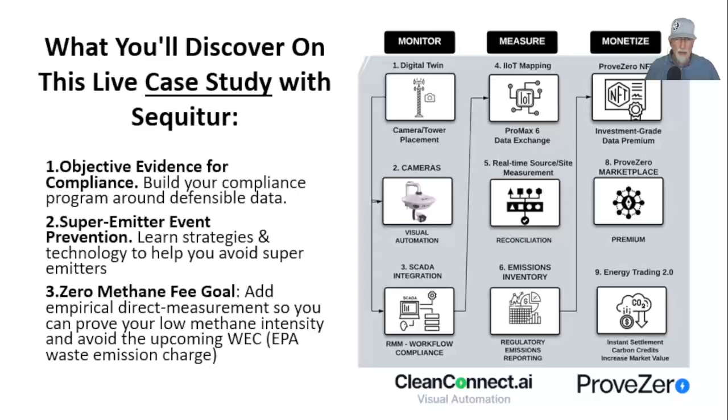So you're wondering, am I in the right place? Well, you are, if you want to learn from an actual operator how he built objective evidence for compliance for Quad O-B and C, and super emitter prevention, and zero methane fee goal. That's the goal, right?

A little bit about me. I'm the co-founder of CleanConnect.ai, host of Digital Roughnecks, a video podcast, founder of Windows NT Magazine, and author of the EPA cheat sheet. CleanConnect is a hardware-enabled SaaS company, so we make our own cameras. First government-approved continuous OGI source-level leak detection system, and first government-approved source-level GHG intensity verification protocol. The 2022 and 2023 Darcy Partner Top Innovator Award winners, and winners of the Oil and Gas Tech Challenge.

I'm here with Russ Perry, the Corporate Health, Safety, Environment, and Regulatory Director. He manages a team of 9 HSE professionals aimed at surpassing mere compliance to foster a proactive safety culture, with 30 years of HSE experience in metals, mining, and energy sectors, and expert in regulatory compliance, environmental auditing, and remediation management. He speaks at a lot of conferences. In fact, we were both speaking at 4C, and we said, why don't we do a webinar together, which is the reason for this webinar today.

Full disclosure, Sequitur is a client of CleanConnect.ai. In his past, he led BP's team post Deepwater Horizon incident to achieve 100% compliance with government agreements and consent orders. He's a licensed professional geologist in Texas, holds a BSc in geology from the University of Illinois at Urbana.

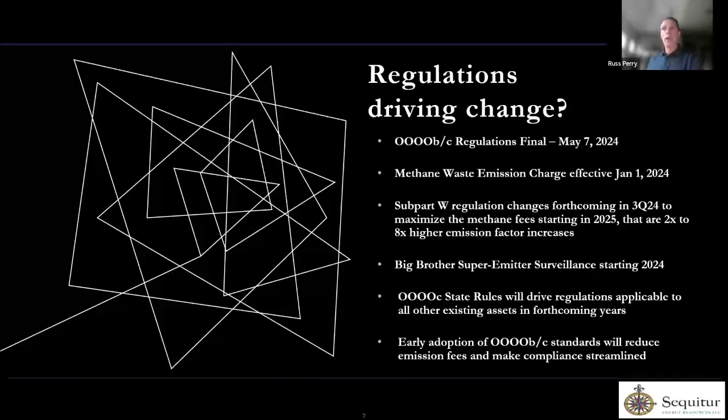We're all familiar with the super emitter program. So what we want to do is make sure we keep our facilities in compliance and avoid situations where there could be a super emitter event. Quad O-C is forthcoming, the states are going to propose that. But the message you're going to hear over and over is that early adoption of the Quad O-B-C standards on all your assets will effectively reduce your emission fees and make compliance more streamlined. In other words, if you adopt these standards on your older facilities, and facilities that aren't applicable to Quad O-B, earlier, you will get to a zero waste emission fee sooner.

So I'm going to focus on those areas. Some of you might have multiple assets, also including potentially gas processing plants, or if you have midstream. But my message is really going to focus on onshore production and gathering and boosting.

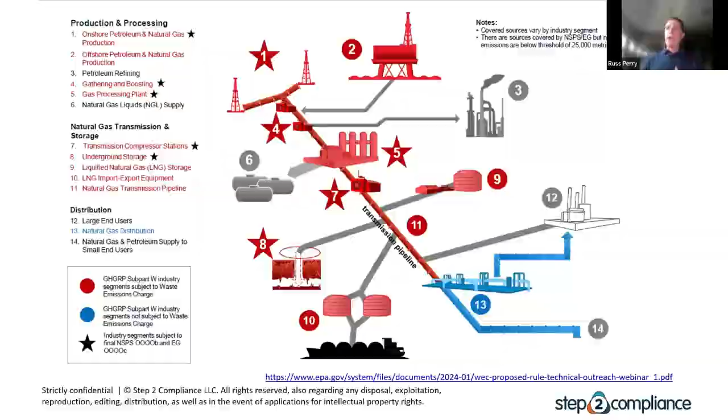Just for clarity, SEM Operating operates solely in the Southern Midland Basin in 4 counties. We are an exploration and production company, and we own a lot of our midstream infrastructure, so our own gathering and our pipeline. We don't officially have compressor stations, if you will. That goes to an off-taker. They purchase our gas, but they are officially the midstream. We just own a majority of our infrastructure.

Now, looking at the waste emission charge, where do you start? How do you streamline your compliance and also get to a point where your waste emission charge is zero or near zero? There's a lot of places.

One of the best places to start is to understand your subpart W greenhouse gas report and your calculations. You're going to have to own it. You're going to have to understand all those different source categories, what they mean, and what information goes into it. Take your 2022 data and your 2023 data and use the proposed waste emission charge calculation and calculate what your fees are.

That's one of your first things you're going to do. You need to inform your management what those potential fees are. Now that you have a baseline of what those fees are going to be, you need to take that money, invest it back into your infrastructure, and make those improvements to reduce your fees. Don't make a donation to the WEC. Don't send your money to the government.

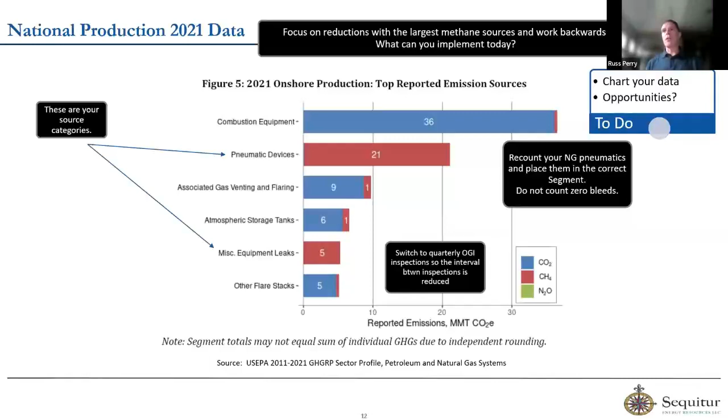Now, our journey started with pneumatics. We did a quantitative analysis. We looked at each segment, so gathering and boosting and production, and then we looked at each of the source categories. We had to dissect that information. We calculated what our potential waste emission charge was. We informed management what that is. They came back, and our goal is zero year after year.

And what do we have to do to get there? We charted all this out, and we created some very unique informed decisions. We risk ranked our facilities. We risk ranked our categories, specifically on the methane portion. And we wanted to really understand where we needed to direct monies. How do we improve facilities? How do we improve automation? How do we improve our data in order to get these numbers down?

So we identified our biggest bang for the buck was focusing solely on pneumatics. Now, some companies might say, hey, we've already addressed our pneumatics. Well, make your informed decision, create something that's fit for purpose. But you're going to do the same process.

You're going to look at your categories and you're going to review your data. We identified that pneumatics in our subpart W, especially on the gathering and boosting side, was 80% of our methane portion.

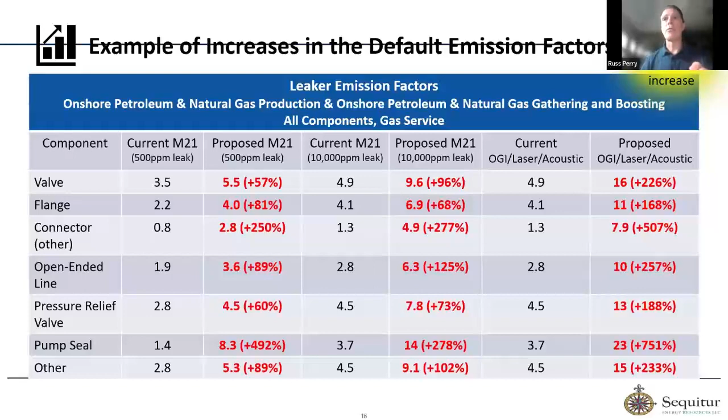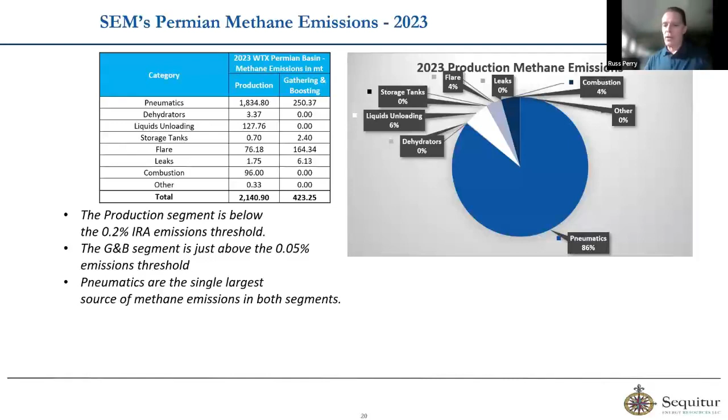So improvements can be made in other areas, such as liquids unloading and flaring. Those are kind of our secondary areas where we've put administrative controls in to reduce flaring. In other words, making a decision to shut in wells in lieu of flaring. Those are more or less administrative controls that you can put in place very easily just based on facility and company policies.

So when we look at pneumatics, I'm going to focus right there. One, we knew that we had to go after pneumatics first. Taking the subpart W data and working backwards, we found that each pneumatic controller that we converted saved 1.5 metric tons of methane per year. Now that's just working backwards.

What that gives you an idea of, for every pneumatic you convert, you can actually create a goal. If you had to reduce, let's say, your methane by 1,500 metric tons, you knew that you had to look at approximately 1,000 units. So that's just a good number to have.

We also identified that for pneumatic pumps and for the pneumatic controllers, there is a difference between runtime hour calculations, and some people call it the pneumatic loophole in subpart W, but EPA did come out and say that it's not the actuation time for a pneumatic, it's actually the amount of time it's pressurized. So one thing you can consider for pumps that are manually operated, in other words, you have to physically turn a valve, you can use the actual runtime in lieu of 8760 hours per year if you manually operate your pneumatic pump.

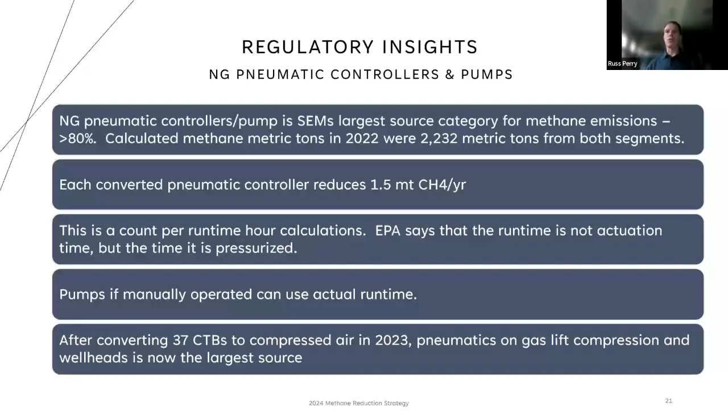So that's just kind of a hack that you can use when you're doing your subpart W calculations. One of the things we did is we identified how many batteries we needed to convert in 2023 in order for when 2024 hit, we would have a zero waste emission charge. So in 2023, we converted 37 central tank batteries to compressed air, and we are just right at that sweet spot where the waste emission charge will be zero or near zero just from doing those conversions.

One thing we've also seen in Quad OB is that there is a 1-year compliance date to get your pneumatic controllers. EPA did rename our new natural gas pneumatic devices over to the name pneumatic controllers. There's a 1-year compliance date for your Quad OB applicable facilities and applicable devices. Now, one thing I will say is don't wait. If you are an early adopter and you convert these early, you will see, year over year, your emissions and your fees reduced just by being an early adopter of converting these pneumatic controllers over either to compressed air, or routing that source back to a process. Those are the two most cost-effective ways, in lieu of buying a new type of controller or a zero bleed controller. So just being an early adopter, just think about that.

Flaring is our second largest source of waste emissions in these calculations. Now, in 2023, in those numbers, we used a 98% efficiency. But if you look at the proposed rules, which we'll see here in a few weeks, they're going to go down to 92%. So you're going to have a significant reduction in your flare efficiency, and your numbers are going to go up. That's just from an emission calculation—you didn't change your asset. It's just EPA said, hey, you're going to use a different calculation method. So going forward, your flare efficiency is going to be paramount, and a system to monitor and verify that your flare is operating efficiently is going to be important to verify compliance underneath the Quad OB requirements.

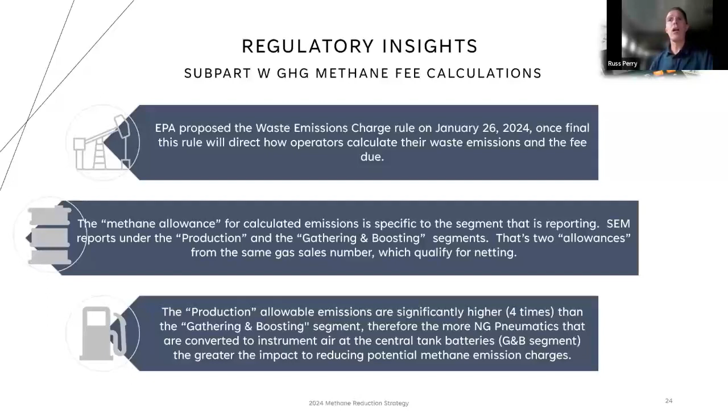So here's a couple scenarios. Let's say you are an upstream producer and you've been reporting in the production-only segment since 2011, when the regulations came out. Why are you reporting there? Well, our consultant told us. But if you look through the definition of a centralized tank battery, you'll find that centralized tank batteries actually fall underneath the gathering and boosting side.

What would this mean for a smaller producer? If you bifurcate, or identify where you need to reallocate your production and gathering and boosting data based on the EPA definitions, you might find you're exempt from greenhouse gas reporting altogether, or that your production number is smaller and the gathering and boosting side is small. This is something you as an operator need to look at in your data and the definitions to see where you fall.

Here's another example. You need to look at the true definitions underneath production and gathering and boosting. We did that between 2021 and 2022 and found we were reporting information in the wrong segments. So we did a very careful recount of our pneumatics, looked at which data was placed into which segment, and made the appropriate change through advice of legal counsel, who was aware of the regulations and definitions. We made this strategic, required change into the proper segments.

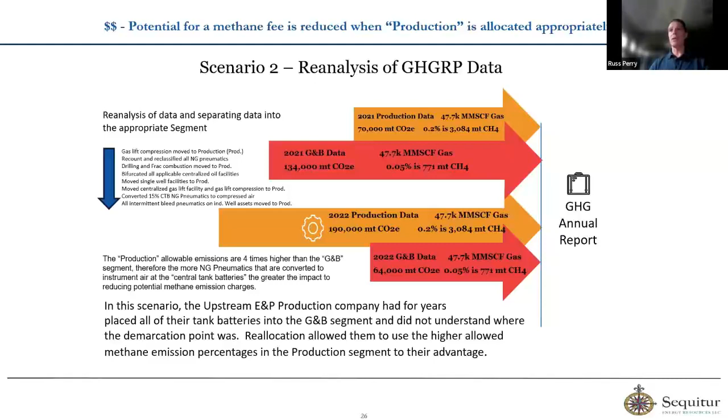Once again, why this is important and why it's going to move the needle in future years is because the allowable emissions are 4 times higher on the production side compared to the gathering and boosting side. So having your data in the right segment is imperative going forward now that this has been monetized.

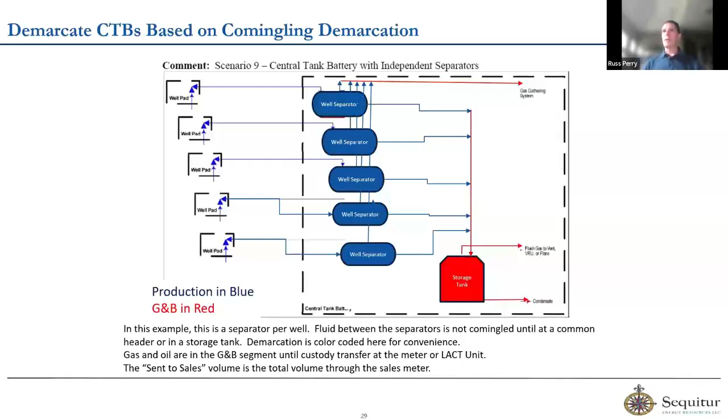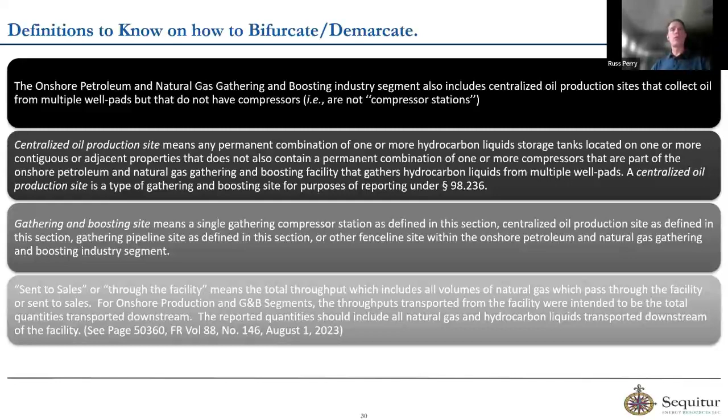I mentioned bifurcating and demarcating between your two segments—it's important to understand the definitions. These come either out of Quad OB or Subpart W. Keep in mind, with these regs being published in the next couple of weeks, we're going to have additional clarity on what these true definitions are, since some were proposed in 2023. Keep in mind, production definitions came out in 2011, but gathering and boosting under Subpart W didn't come out until 2015. So you need to understand where you're pulling your definitions from and make sure your demarcation is done appropriately.

The waste emission fees—this is probably one of the most paramount things you have to understand. Your waste emission fee is going to be based upon your total throughput at your sales point. This throughput includes all the natural gas and hydrocarbon liquids transported downstream from the facility, out of your gas sales meter. So when you ask your accounting, production, royalty, or operations department what your gas sales meter number is, you're going to get probably 4 different numbers—I received 5, depending on who I asked and how I asked. This is key because your waste emission charge is based upon a calculation from that gas sales meter at the back end of your facility.

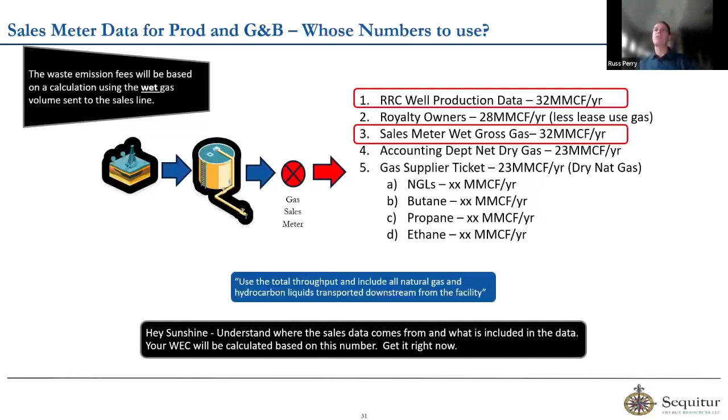For my company, it is a wet gas, a gross gas number. It happens to align with our Texas Railroad Commission well production data, but it is a wet number. If I ask accounting, they give me a dry gas number, because they get information from our midstream buyers that breaks out NGLs, butane, propane, ethane. So you want to get this right—you need to understand this gas sales meter number. All right, different insights, different areas.

Since your waste emission fee is based upon your gas sent to sales, you need to maximize that. There's a couple areas you want to focus on. More gas to sales means you have a lower calculated waste emission fee.

These are my top things: make sure your VRUs are sized properly, have high reliability and good runtime. For most of us operating in the Permian, it's the vapor recovery units on our vapor recovery towers and tanks that put additional gas into the sales line.

And with high line pressure, you have to have the VRUs to get that gas into the line. You want to make sure your alarms are turned on and you get those notices promptly. We have one facility where we have the Clean Connect AI system.

And what we noticed was all of a sudden we get an alarm from the Clean Connect system within 10 minutes saying, hey, we have thief hatches leaking. Why are the thief hatches leaking? Well, what we identified was our VRU went into default. So after 10 minutes of these VRUs being down, we started seeing a little poof on our thief hatches at this facility, and we get this alarm from Clean Connect.

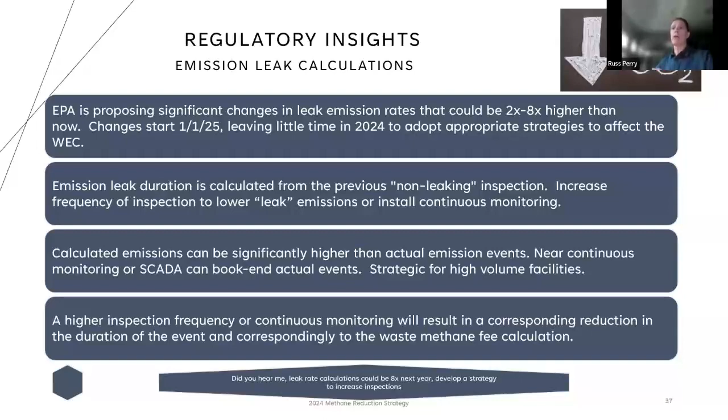So once again, these leak rate calculations for the 2025 compliance year can be as high as 8 times. So develop your strategy now, increase your inspections, look at the alternatives, put your strategy in place.

Record keeping. When we looked at Subpart W year over year, every year we have identified little nuggets that we could do to improve our record keeping, to improve our objective evidence, to verify compliance.

What is essentially happening is Subpart W has been hijacked. It is now truly a carbon accounting form. Every CFO in every corporation is now going to be asking, I need your waste emission charge, I need to know those projections. It potentially will be something that is going to be audited. It will create a requirement for attestation. The paradigm is shifting.

Understand the importance of all the data going into the Subpart W, why your record keeping is going to be important, how you're going to collect it, refine your record keeping. And what you're going to identify is you need more frequent data collection. So we decided to go on monthly and recalculate those waste emission charges every quarter, creating a projection every quarter of what that potential fee is, and using that timing as an opportunity to strategically identify different areas where we can reduce those fees.

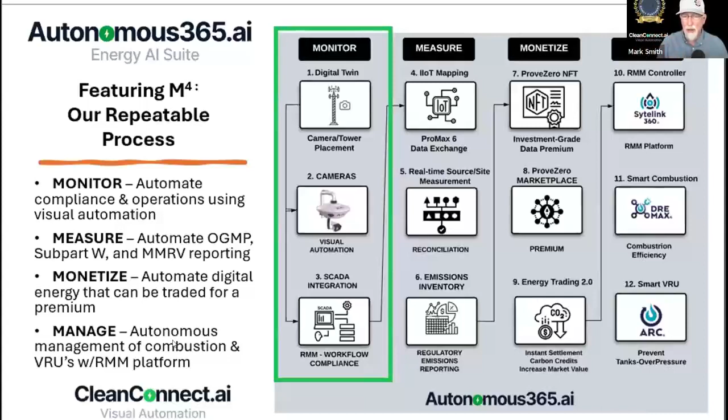I'm going to focus primarily today on the monitor side because that's a lot, but we could also get into the measure, monetize, and manage.

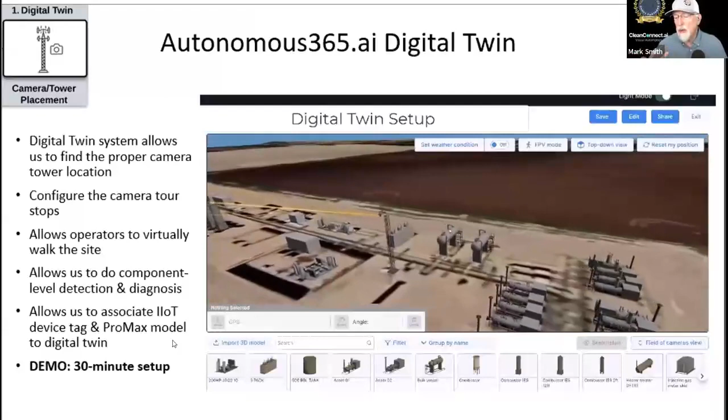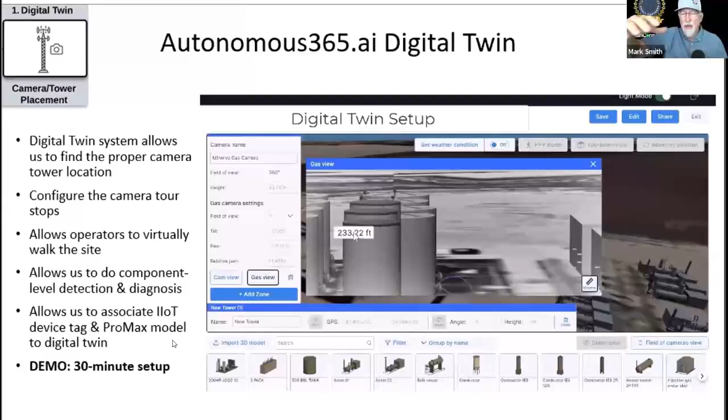So on the monitor side, what we do is we first set up a digital twin. We originally created this digital twin because what was happening, we'd have an installer go out on a site and we're like, where do we place the tower? Where do we place this camera so that it has the best viewpoint, the right height, the right distance to all the objects, so we can see everything on a site for continuous OGI monitoring.

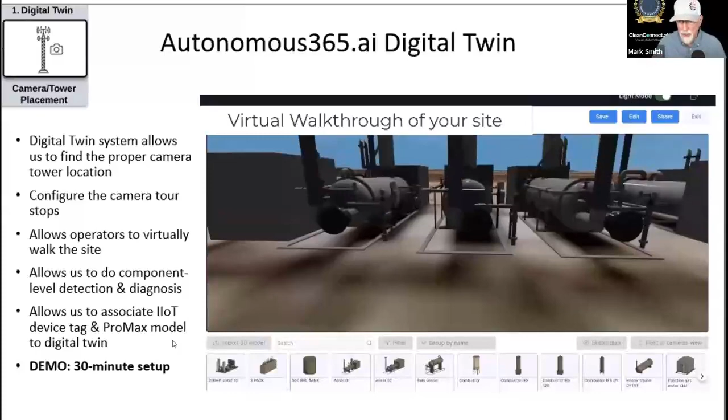You can see here that this digital twin allows you to literally virtually walk through a site, and this would have been super handy. I was with another client who's trying to get a permit, and the regulators were really struggling to see what this site is going to look like when it's actually built.

And I think in the future, we show them a digital twin, they'll say, oh, now I know exactly what this is going to look like. But what it allows us to do is set up the configuration, the tower location of the cameras ahead of time.

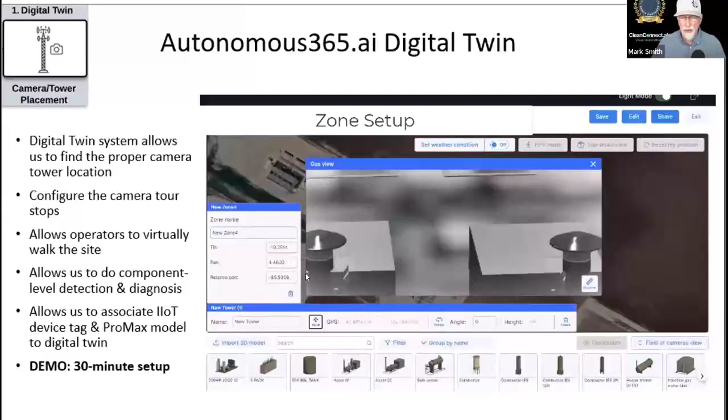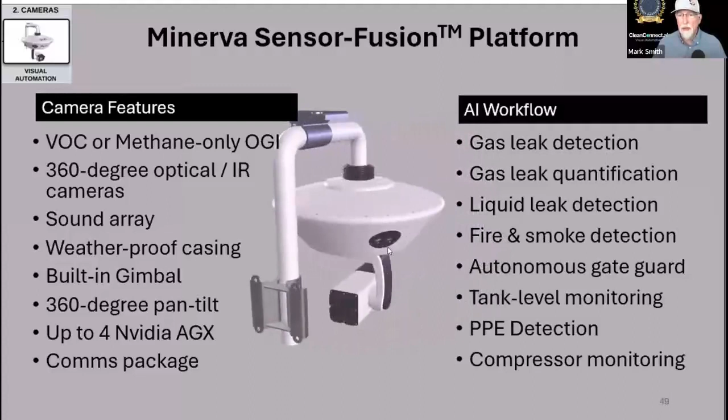So when the installers are there, they know exactly where to put the camera, the angles it's going to see, and so on. This particular multi-well facility you saw walking through was a 30-minute setup by one of our techs. The camera system we have, which we call Minerva Sensor Fusion, has multiple optical, infrared, and OGI setup and a built-in gimbal.

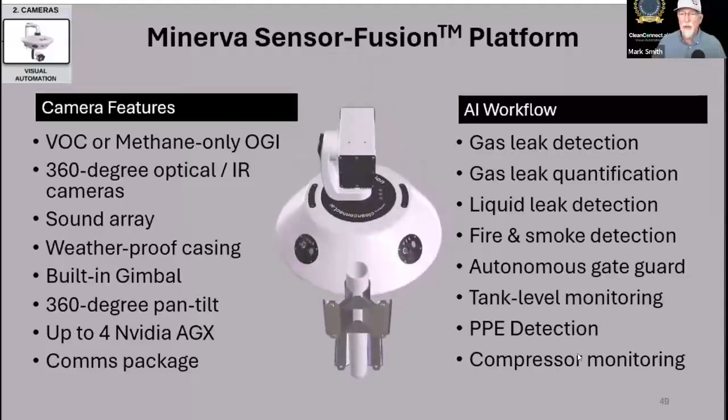This platform is perfect because we can use it to do gas leak detection, quantification, liquid leak, fire and smoke, autonomous gate guard, tank level monitoring, PPE detection, compressor monitoring. So all the things you need for compliance, but even beyond the things that ops wants so that they can reduce the call outs.

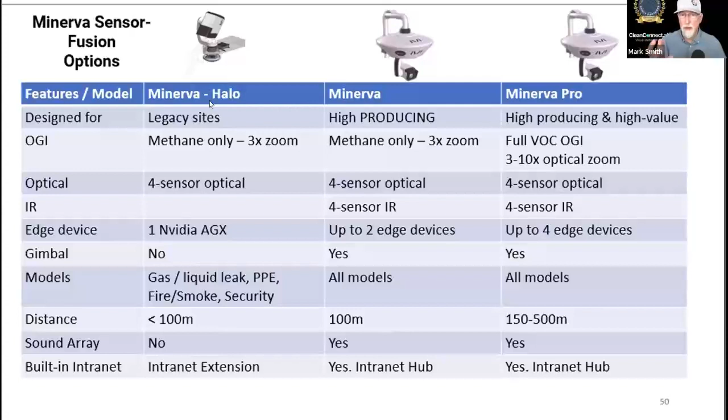We do have 3 versions of this. So we have a Minerva Pro, Minerva, and then a Halo, which is for your legacy sites. It's a methane only camera.

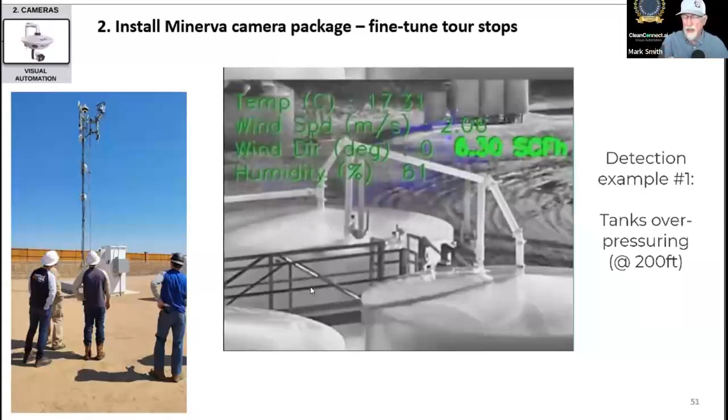Once you set this up on a tower and whatnot, we can then fine tune it and further define the tour stops, and you can get right down to that component level. You can even draw objects around components, and then we associate that later with a ProMax model. So we know exactly what we're looking at, and we can get very detailed in terms of the detections and the quantifications.

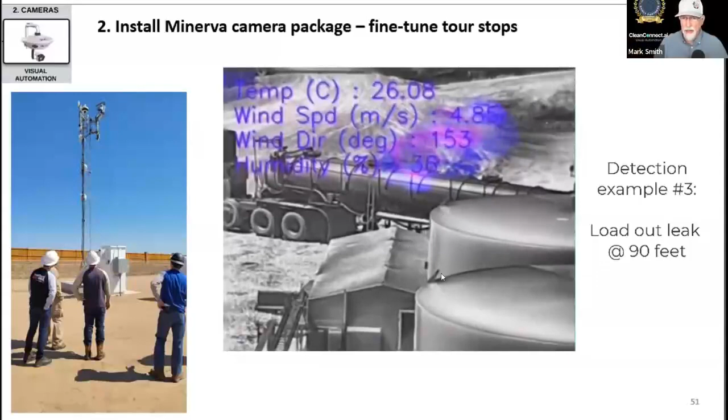So there's 3 of the very common things we see: tanks overpressuring, cold venting, and in this case, a pump truck loadout. Now, we also give operators the ability to do a live view.

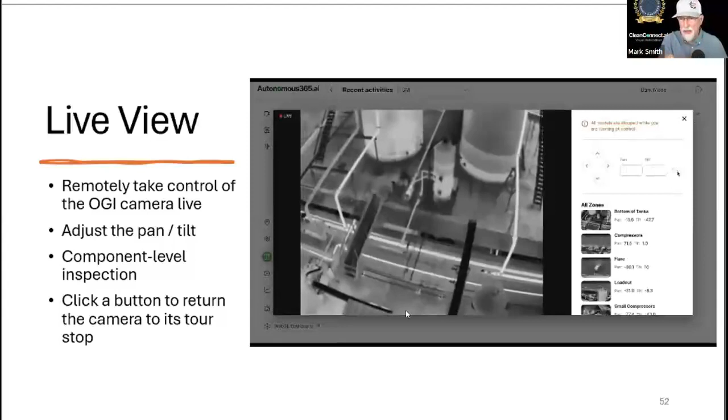So let's say at a tour stop you find something and you say, oh wait, let me dial in and see what this thing is. You can literally take control of an OGI camera. Now, mind you, this is remotely. There's nobody on site. This could be 3 hours away, and you take control of it, take a look at what you want to look at, change the pan tilt.

And then as soon as you're done looking, you know what's wrong, you click a button and it goes right back onto the tour.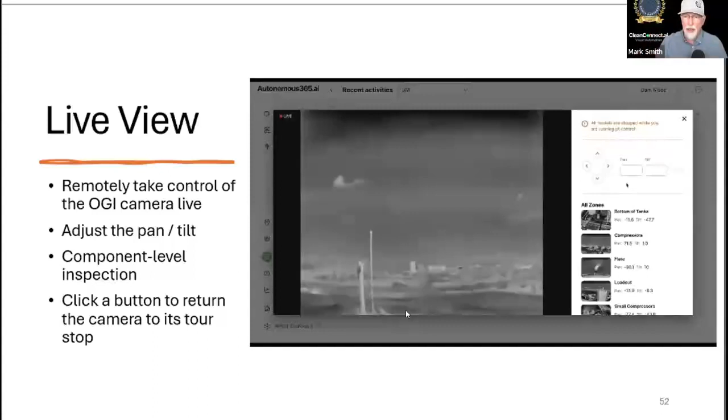And the way it works is our cameras go to an edge device. We connect to every SCADA system out there with either MQTT or Modbus, and you get alerts through SCADA, or through our platform, we send the exceptions up that Russ mentioned before.

And we got government certified in Colorado called the Alt-AIMM, where we had to prove source level detection, blind testing, prove equivalency that our autonomous LDAR was equivalent to a human doing monthly OGI inspections. Alternative work practice, we were endorsed by Civitas and PDC, and we got EPA Region 8 approval.

And I heard some good news, Russ, that we're going through the same approval at the federal level. And the person that approved us at EPA Region 8 is the same person who's going to be working on our application at the federal level. So that's really good news.

We got this Alt-AIMM approval letter, which means that once you use Clean Connect, it replaces regulatory monthly LDAR, because they have monthly LDAR in Colorado, AVO inspections, and tank emission monitoring. So again, we wanted to help our clients eliminate a lot of the regulatory call-outs and do as much remote monitoring and management as possible.

It has a workflow, and this workflow is being enhanced bit by bit. I'm going to show you an example, but we use AI detection, assisted diagnostics. We have a repair system. We can verify the repair, and they do all that bottoms-up inventory reporting, and then we use that data to retrain the model.

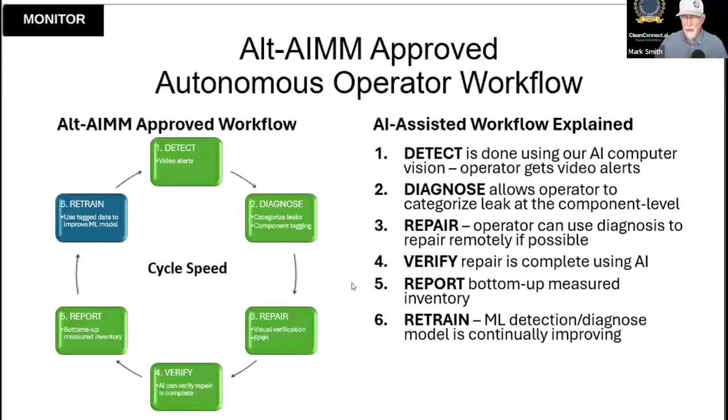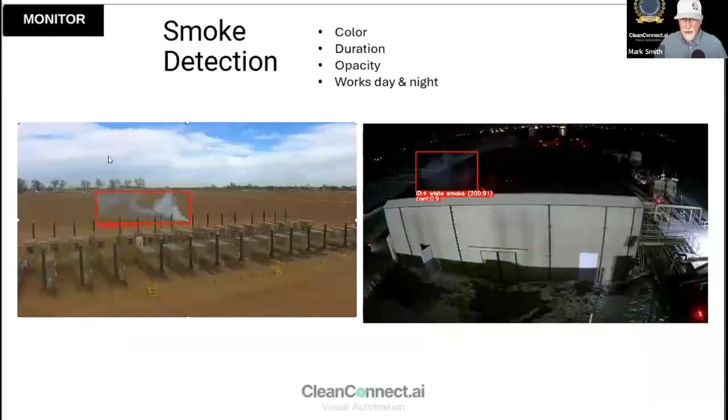You can do smoke detection, and you can look for different qualities of the smoke or the flame. Here's a couple more examples of smoke detection. It works during day or night.

And here's something that we're getting ready to release, our Method 22 autonomous inspections.

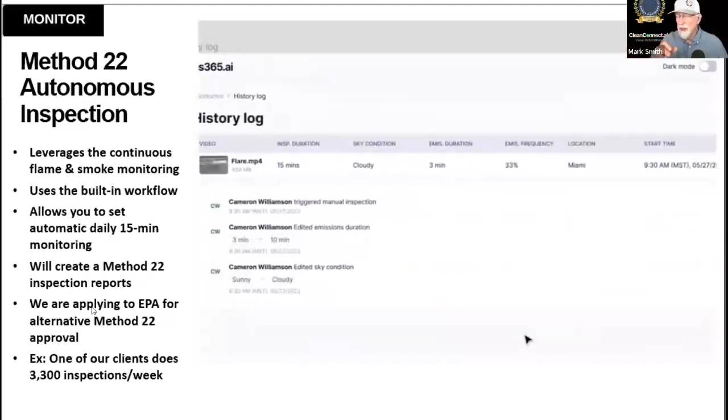So what you all have to do is check those for any kind of smoke on a monthly basis. You have to look at it for 15 minutes and then say, hey, did it smoke within a minute?

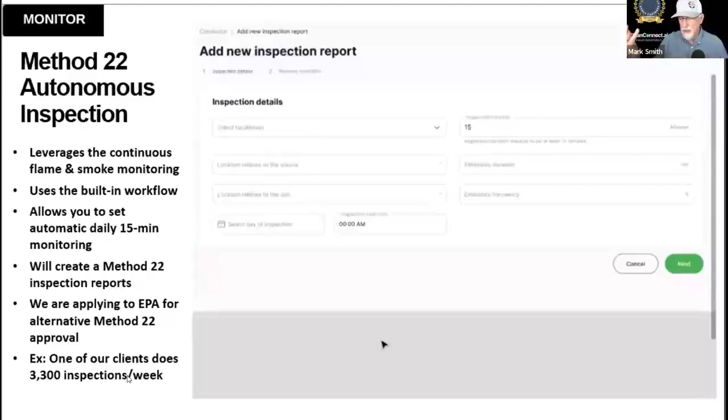Anyway, we're now automating all that because we have cameras doing continuous inspection. Why not handle your Method 22 as well? It allows you to set those up, automate them, and do all the appropriate record keeping. We are meeting with the EPA Method 22 person to get this whole automated system approved. One of our clients does 3,300 inspections a week of just Method 22, so imagine the savings from having it automated.

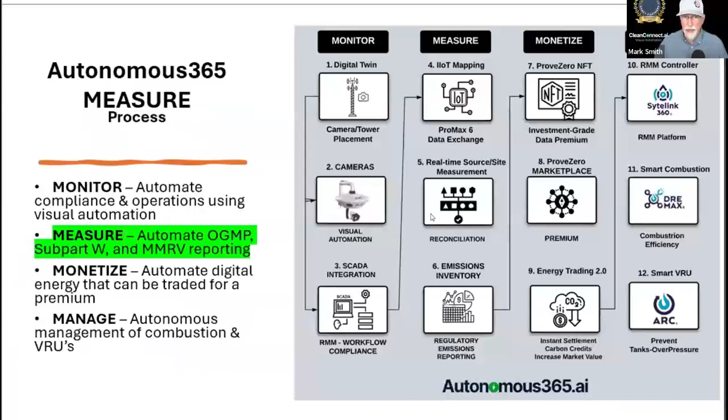All of those alerts go into a dashboard, which you can sort by geographical location or type of alert. You can set different kinds of alerts, who gets them depending on size or duration or whatnot. So that's an overview of Monitor.

Just real quickly on the Measure side, essentially what we do is computer vision. That all goes into an edge device, and we tie into your IoT devices. We run those through a brand new feature, which I covered last month in a webinar with Pure West — the ProMax version 6 data exchange allows us to have a live data reading, live mass balance, live non-fugitive emissions, and get some really detailed stuff that allows us to produce reports.

If you look at this, you'll say, wait, those are all the things that are in Subpart W — those are all the details. Yes indeed, and we are working very closely with Colorado to get this automated empirical emissions inventory created.

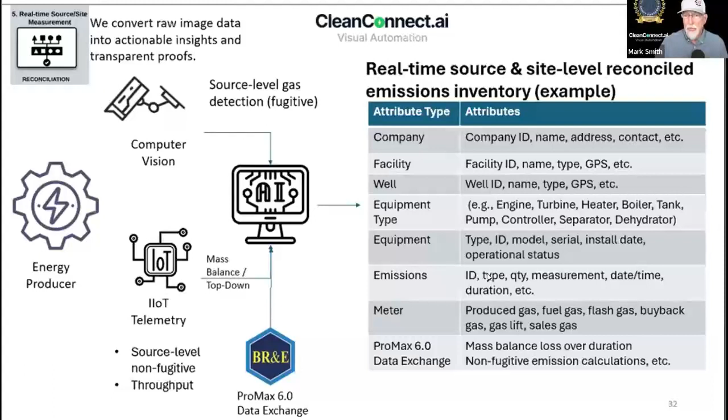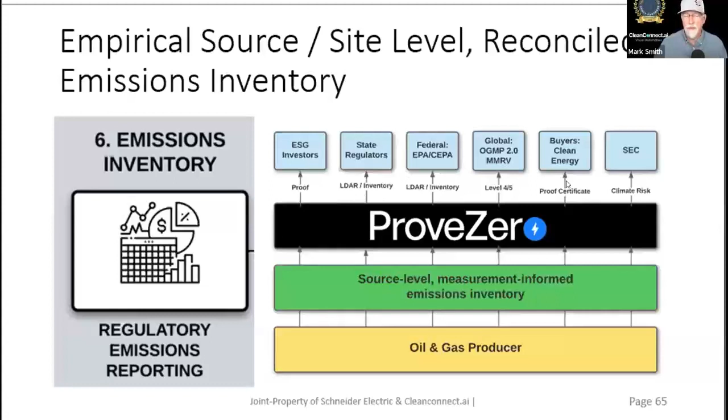And the big idea is that all these emissions inventories are actually coming together — Subpart W, Colorado GHG intensity, OGMP 2.0 Level 5, and the new MMRV. They're all starting to merge together. We solve for the hardest one of those, so we don't want you doing 4 different things — do one thing and have 4 different outputs.

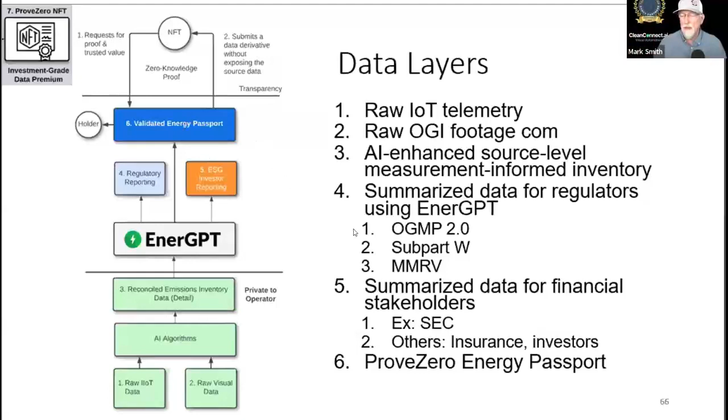We have this layered system, so this is all your data. We're creating a natural language query process because there's going to be a ton of data. You can literally type in things like, hey, did I have any super emitters on October 12th in this basin? And up comes a report. All the back-end SQL stuff we handle for you. We also produce an NFT that could be sold in different ways.

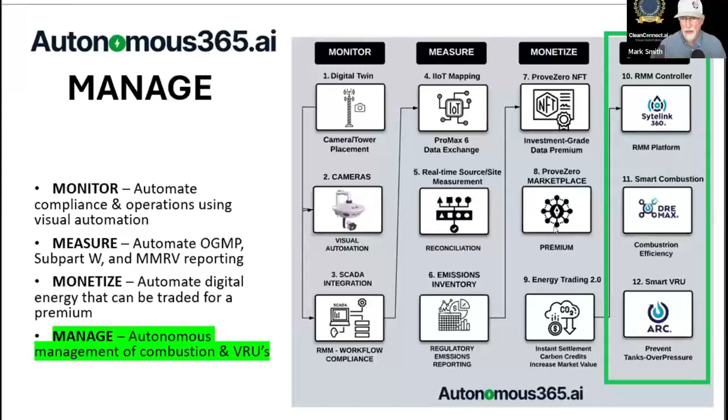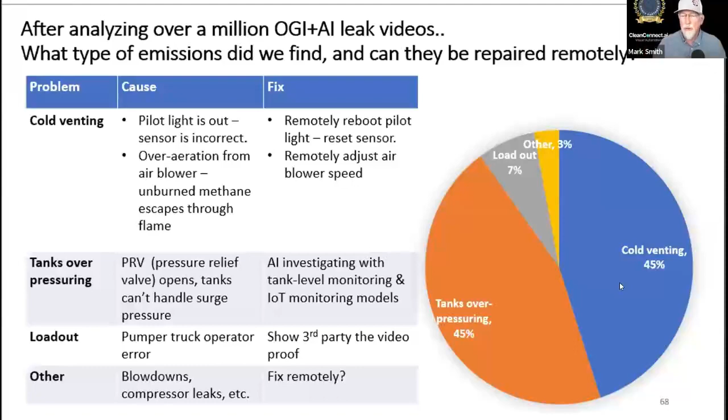So anyway, that's that. With the Manage side, one of the things we set out to do in the beginning was autonomous LDAR. We're working with Cimarron very closely to solve common problems — instead of sending a guy out to deal with cold venting or tanks overpressuring, what if we could combine some things with Cimarron and prevent those from happening in the first place?

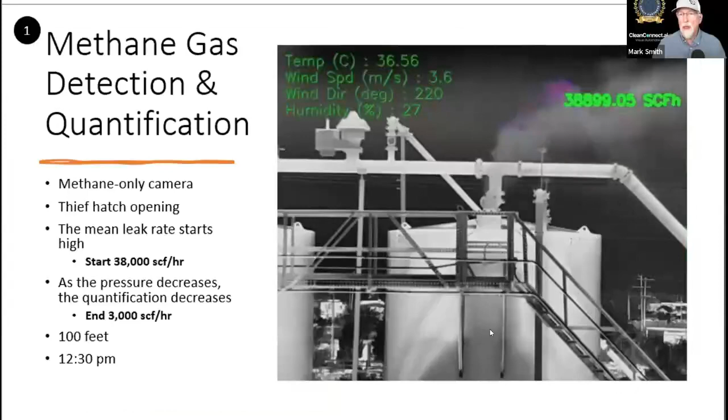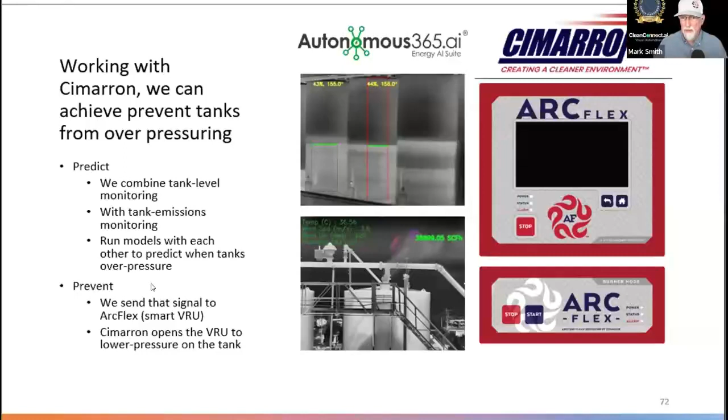So we do tank level monitoring very accurately, and we do tank emission monitoring. What if we combine those two and could predict when a tank would overpressure, then send a signal to a smart VRU to relieve the pressure, eliminating tanks from overpressuring — thus eliminating one of the big potential sources of a super emitter. Same thing with using our cameras and their DRE-Max 2.0 to optimize the flare so it's always running perfectly.

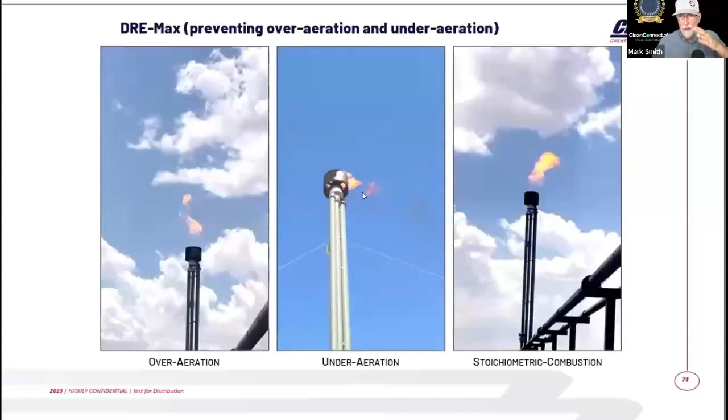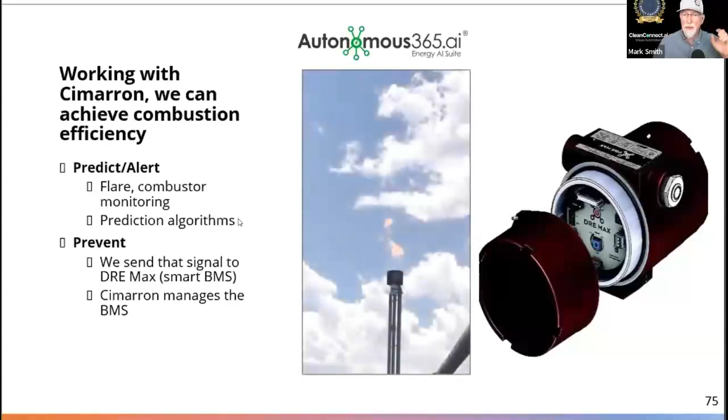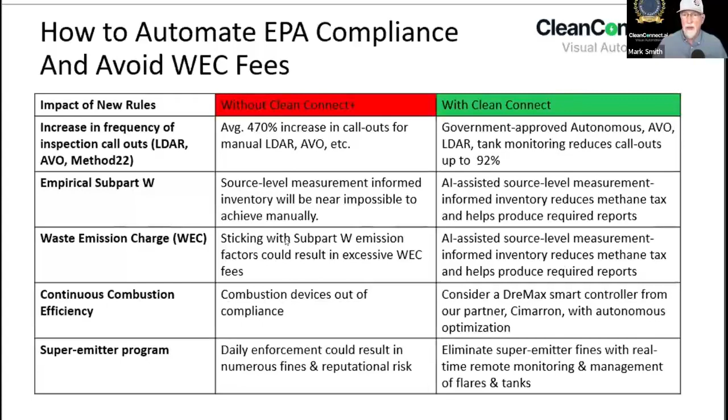They have a new device, this DRE-Max, and we combine it with our cameras to come up with a DRE-Max 2 — again, keeping everything compliant and trying to prevent those super emitters from happening. So anyway, like I said, I just showed you how you can start to automate some of these things, which has an absolute impact on the waste emission charge and getting that down.